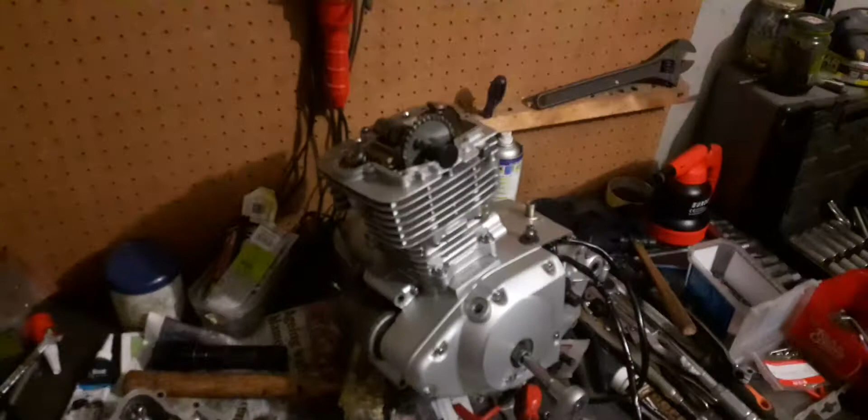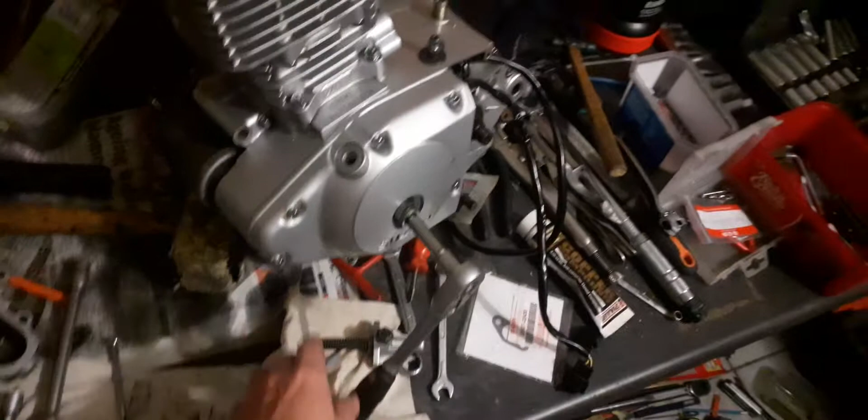Alright, this camshaft installation, make sure that your index lines are lining up, otherwise it's going to be a complete balls up. How to tighten these things, right? You're going to have to hold the flywheel, okay, with a ratchet, and of course you're going to have to take another ratchet, your Loctite of course, using Loctite, and you're going to have to put your knee down there. What I did over there, I put my knee down over there, and tightened.

Then I rotated the crankshaft. Alright, let's just rotate the crankshaft there. There we go. Use my knee, hold that in place, Loctite, tighten.

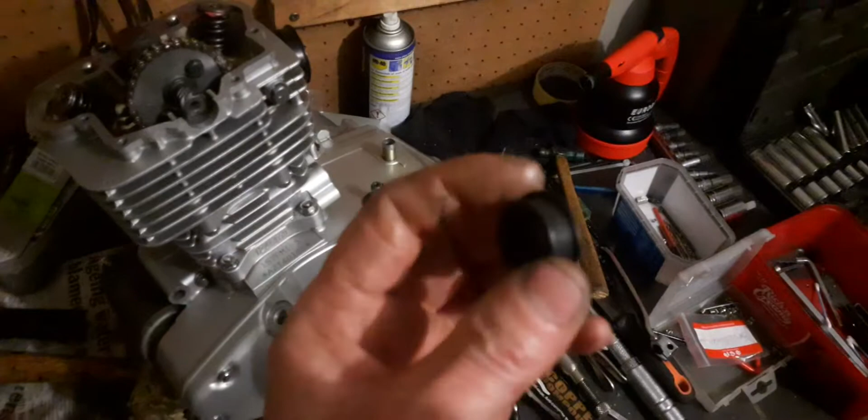Right, now that is done, I've cleaned off the mating surface here with some of this stuff over there, and I've also cleaned out this inspection cap here, because I'm going to be using some RTV gasket sealant. Make sure your locating dowels are in place, there's one there, mating surface is clean, and you're going to have to use some RTV gasket sealant.

Watch the previous videos, I also showed you to use the earbud cleaners so you can blow it out with the compressor, but that thing makes a hell of a noise. Make sure your threads are clean. The thread holes are clean. Right, so I know for a fact this must stand for 24 hours to cure before you actually assemble it and do a startup. It has to sit.

This Loctite, where's the Loctite? It's around here, somewhere in my pigsty table over here.

Okay, so what we can do now, we can put some RTV gasket sealant on here, my inspection cap, and of course, before we close up over here, we're going to slightly lube this camshaft and this timing chain, because the last thing we want to do is have a dry startup. Okay, put the video on pause.

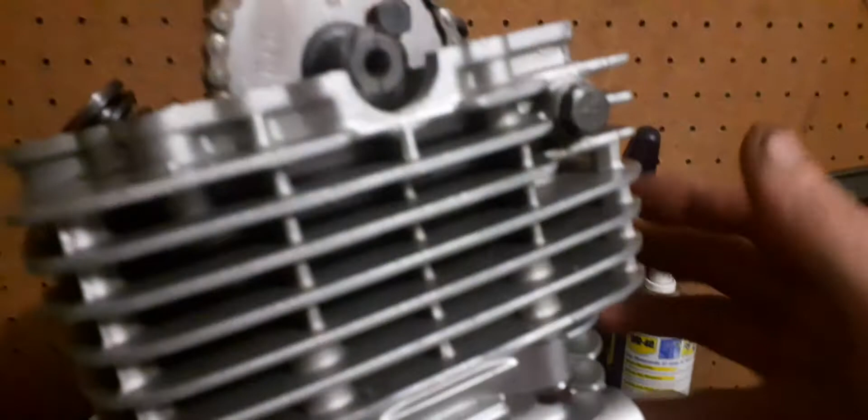Oh, hang on. Before we go any further, you must remember now your timing chain does stretch. It does stretch. If you see my previous video, it's the same thing like your drive chain on your rear wheel over there. So what we do over here, we're going to install our finger. Pretend we are getting lucky. Take as long fingers as you can and install that.

What you can also do is you can check these linkages. If they lift, if this thing does that like that, then you know your timing chain is totally stuffed. You see there is a bit of play on there, but keep in mind that it is 54,000 on there. Very little. See there. So I still got, I would say, another 20,000 on this timing chain. This timing chain I will replace in the coming months, right?

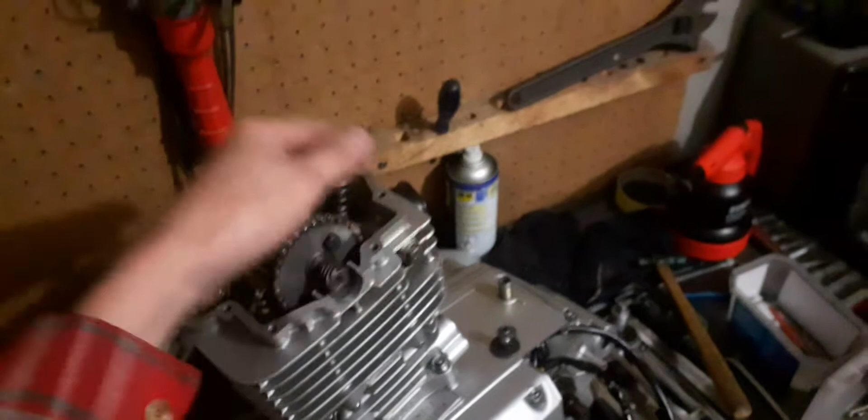I'd rather be safe than sorry. The last thing I want is this thing to snap. Then you can kiss your top end, your head, and your bloody barrel and your crankshaft goodbye. So let's install the RTV gasket sealant.

Alrighty, just look how I've installed the RTV gasket sealant, okay? I didn't smear it with my finger flat like that. I've made a little bit of ridges. Yes, it's a bit excessive on there, a little bit much, but I'm using some of my spirits before it dries and wipe it off. So all the stuff that peels out on the edges over there, I'm gonna wipe it off.

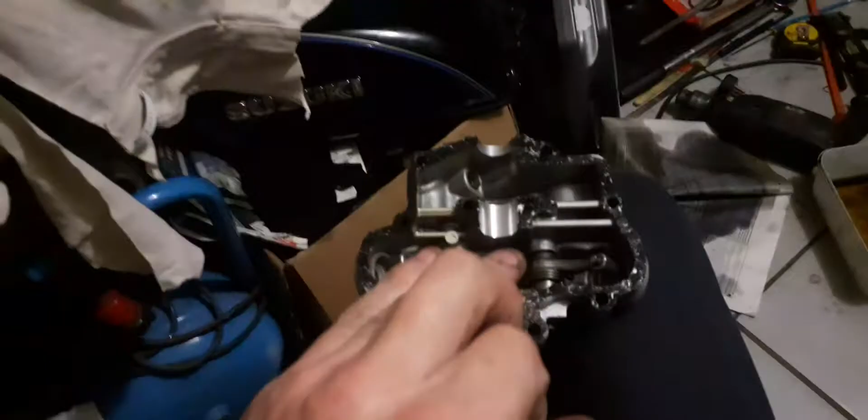Don't be waiting until it dries and then taking the blade or your fingers and pulling it out on there, otherwise you're just gonna destroy the, how do I say, the seal. So if it's still popping out before it dries, I'll take my spirits and wipe it off clean. Okay, that's done. Next one is our inspection cap over here. I'm going to wipe some on here.

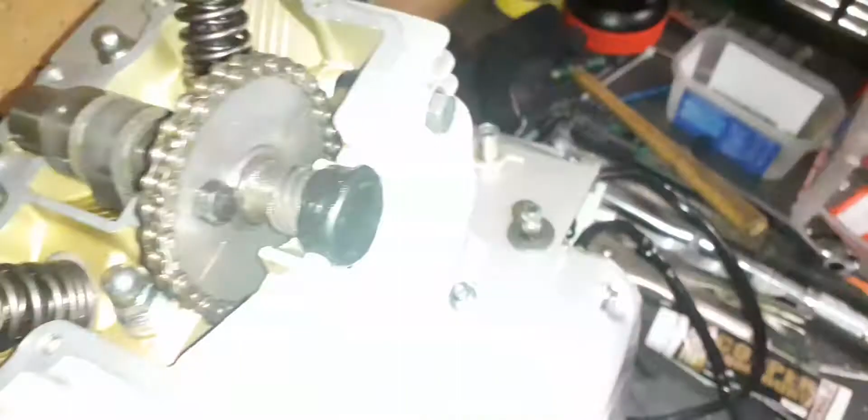Alrighty, I've just installed my inspection cap over there. Don't worry about the RTV gasket sealant that spurts out on the side over there. We're going to wipe it off. Now it's time for me to do some lube up here on this cam and the timing chain. The last thing I want is this thing to do a dry start. Let's just take some engine oil over there.

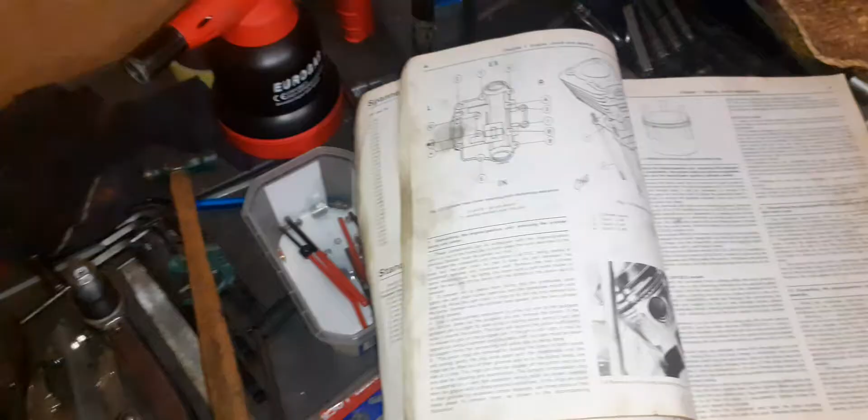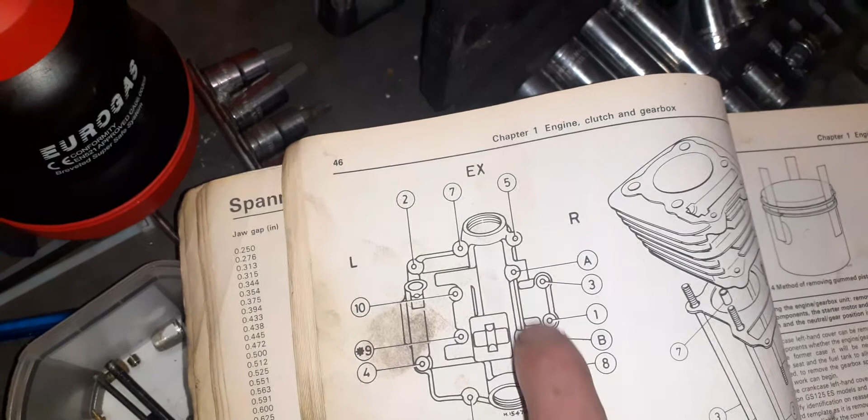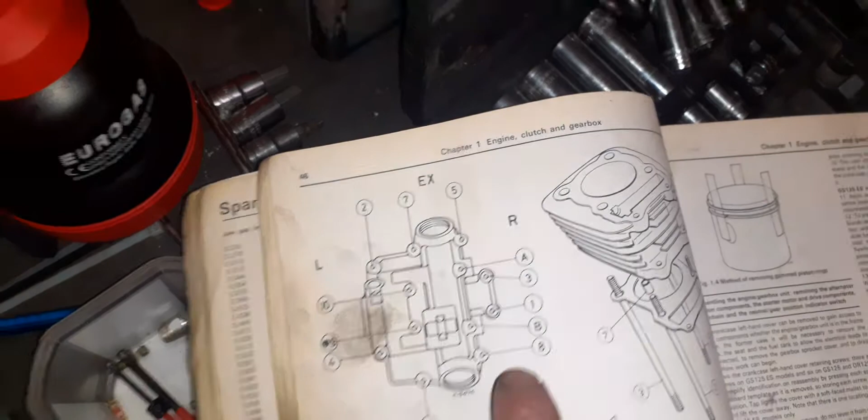Alrighty, just got my service manual over here, and this is now the slackening sequence, but I'm also going to use this for the tightening sequence. You understand what I'm saying? So there is 1, 2, 3, where's 4 now? 4, 5, and 6, and 7, and there's 8. Okay, understand? So this must sit for 24 hours to cure.

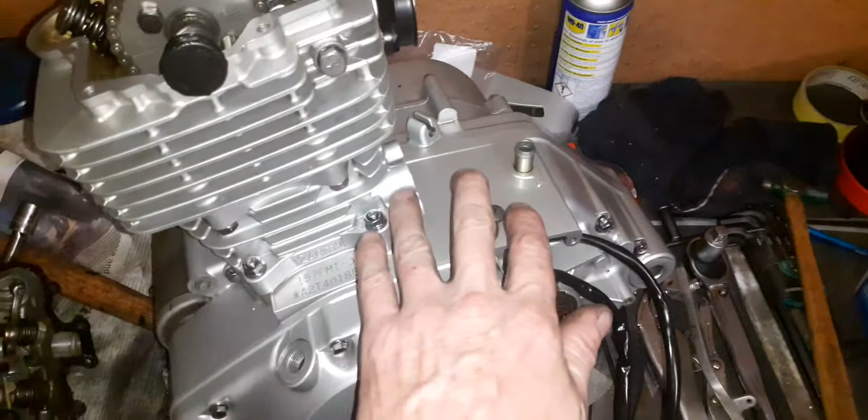Right, this will be the last video on this, and then tomorrow evening we'll make another one on the cam chain tensioner, and then of course the rev counter housing. There's a little rev counter housing that connects on here, a shaft that rotates, that tells you the RPM on the motorcycle itself.